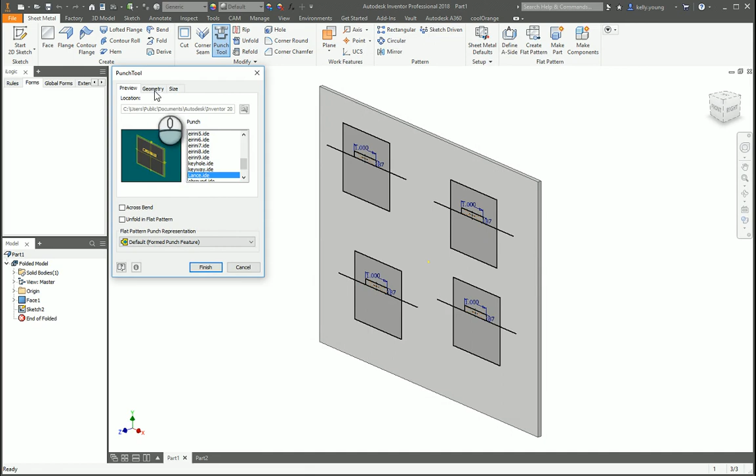So what's happening is you're going into the punch tool and you're hitting your lance, and then you're hitting finish and it's saying unsatisfied geometric inputs. What that's looking at is because it's wanting your reference line. So if you choose here and then your face is here and then finish, but then it comes in a little squirrely and kind of flips around and does all that. So I'll show you kind of a different way to go about doing this, and hopefully that'll help.

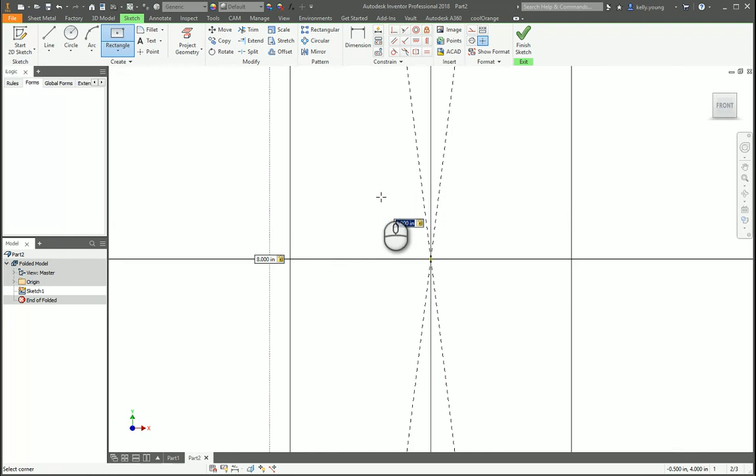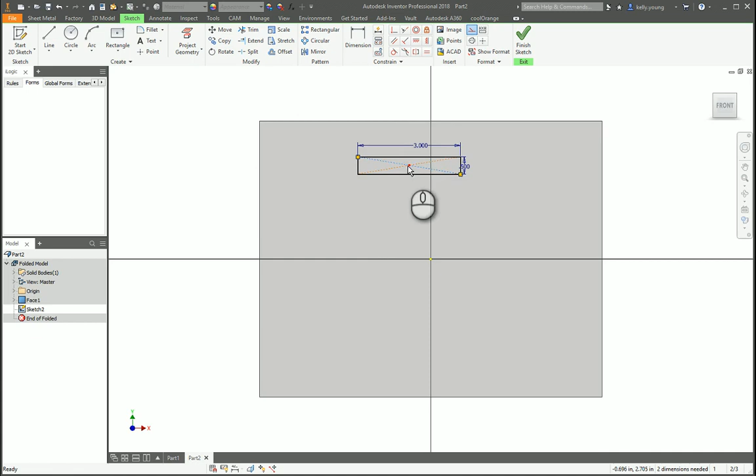So we'll start from the base here and make that a face. So we just have our sheet. So create our sketch in here, and like you had, so we'll just do length equals 5 and width equals half. Let's put it at 3. All right, and put our little point in the middle and finish our sketch.

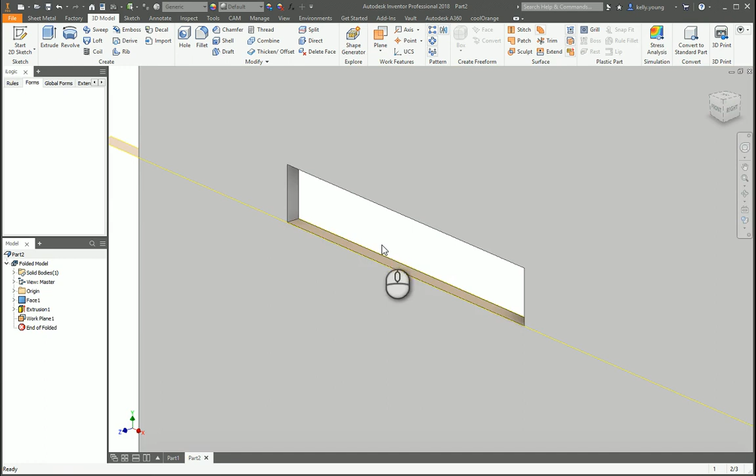3D model, extrude, cut at our thickness. Now, this is the way I always do it. I don't know if this is actually correct, but I do a line or a plane on that line because it's going to generate that line, and as long as it knows that this plane is 90 degrees, it won't ask you for the geometry later. So it's kind of defining that this is at 90 degrees from that line and the face that you already have.

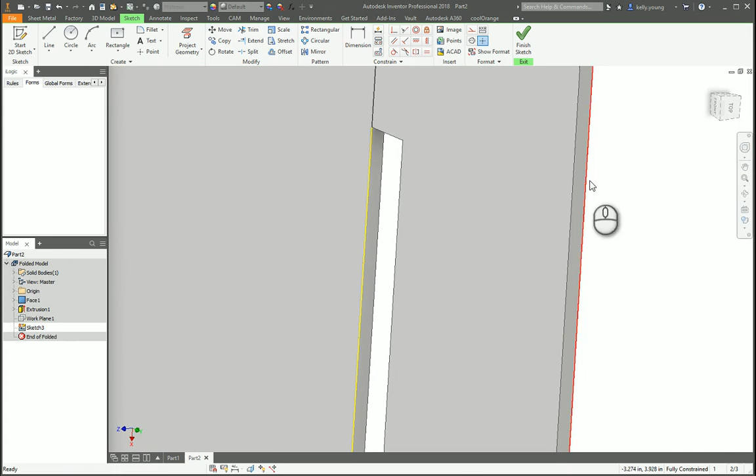So anyway, we create a sketch onto here, project the geometry of this edge, and since that edge is inside of this extrusion for the whole thing, you can use it. If you project like an outside edge over here, it won't work because this part isn't being brought into the punch. So this line is included in the punch technically because we're also going to include that cut. So I hope that kind of makes sense.

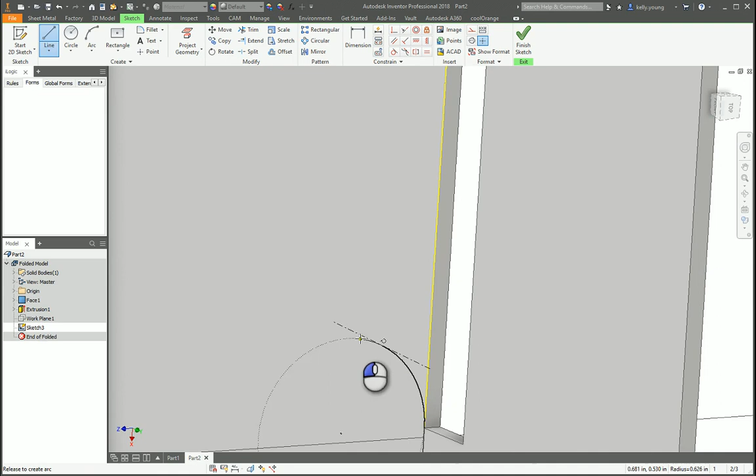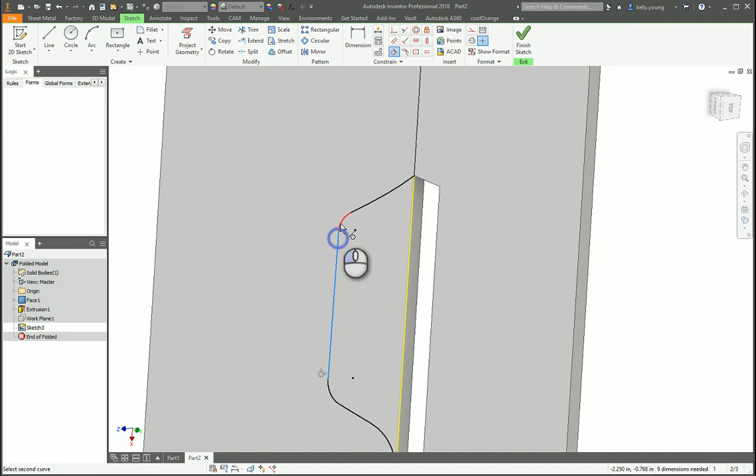But so make our arc and then our line. Oops. Over. Okay, so then we can make sure that these are all tangent. Just kidding. Okay, so let's also make these equal. Save us some dimensioning later.

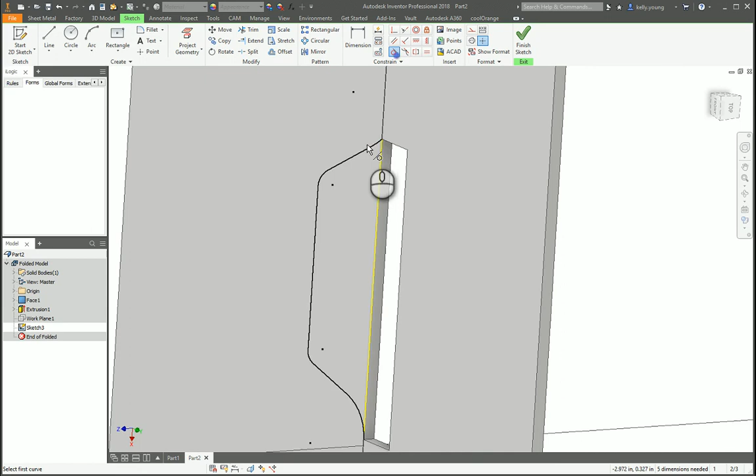Okay, so, and we still need to get this one. Okay, so if we come in, let's say, 2,

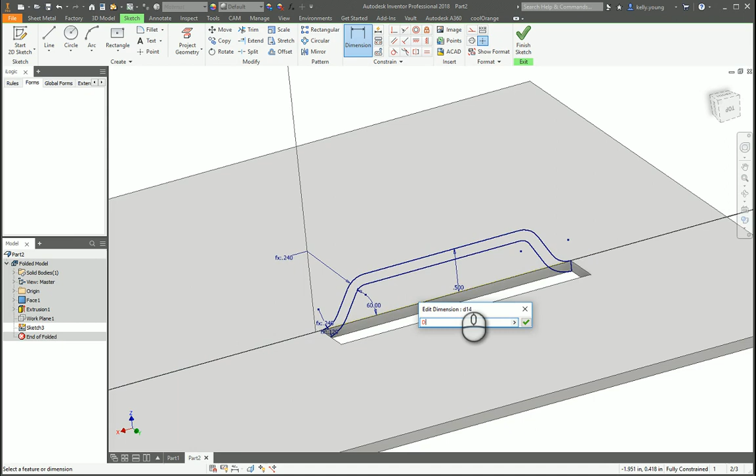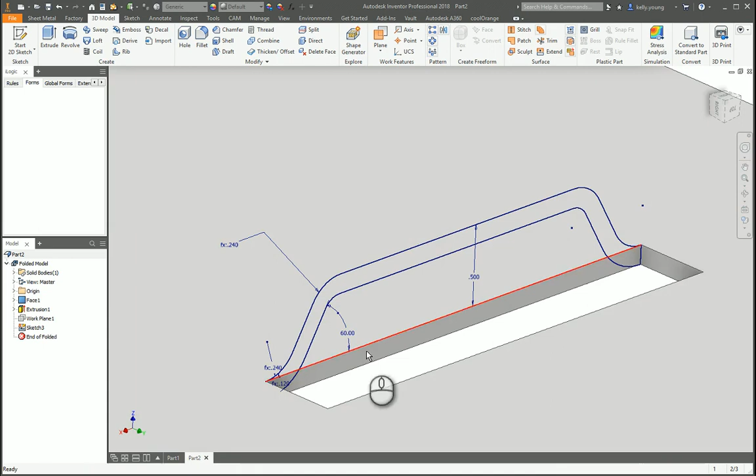okay, so now we have this defined, finish this sketch. Let's look at the parameters real quick. And we have depth, angle, okay, and extrude to the next. Okay, so we have our little feature here.

Now we can go up to our manage, extract our iFeature. And see how it grabs that plane? So we can save it. And we're going to call this, oops,

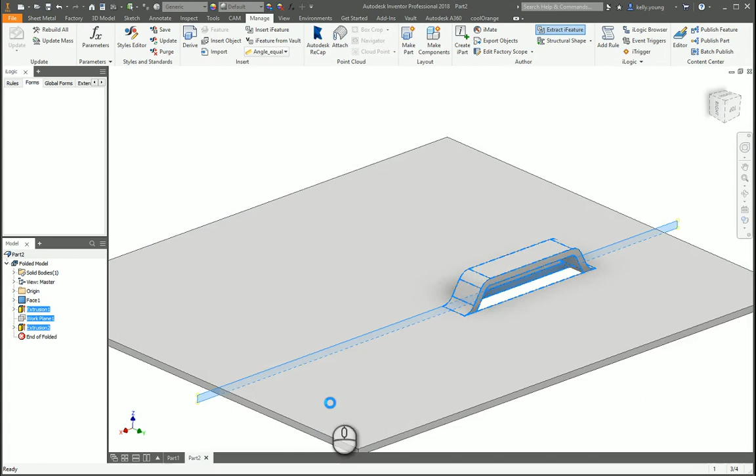come back into our part, do our punch. Look at the geometry, it's not asking for anything, but it found 4 centers. And then you can change the size here, and you finish, and it makes your punch.

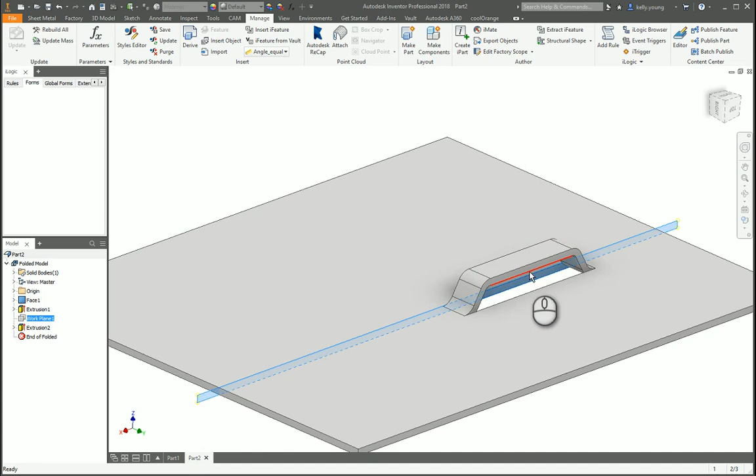So I hope that helps let you know kind of what's going on. I think the main thing is setting up this little work plane off the edge. That's how I found the easiest way, is just a kind of little trick to set that plane so it doesn't ask you for the geometry later. And then that gets you going.